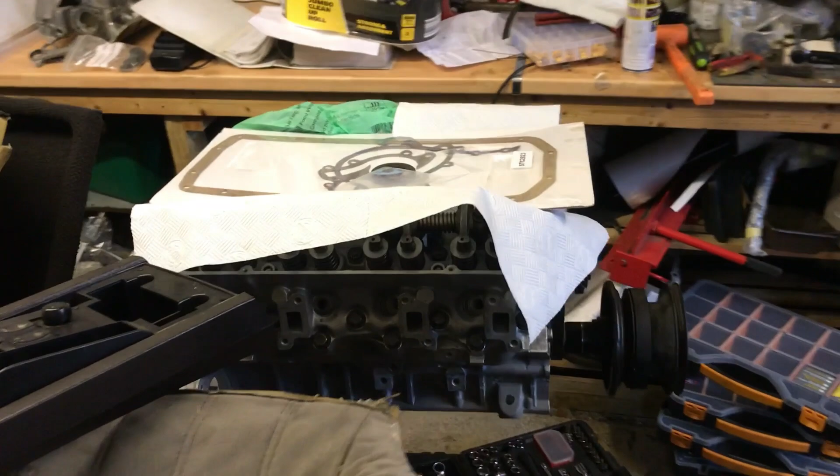After the successes of putting the engine mostly back together, my workshop became a complete mess. So I am going to do some more work on the engine, including fitting, well, I don't know what I'm going to do. I'm going to tinker with it. But I need to have a damn good tidy up first, so that's what I'm going to do.

That's better. It might not look like much of an improvement, but for me this is actually quite tidy, and I've uncovered some of the bits that I needed to start reassembling the front cover and the windage tray, or windage tray, whatever you want to call it. And I found the sump as well, which I hadn't really lost, but I'd kind of neglected that it needed cleaning.

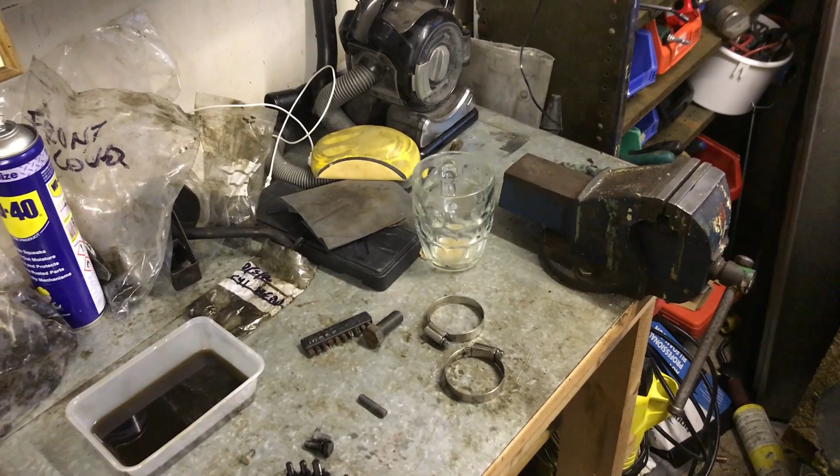One minor setback: there is a real downside to drinking tea out of a pint glass, because it's easy to knock over, and if you do knock it over, you lose a hell of a lot more volume. And I basically spilt a whole pint of tea across all of this, which then drained down, filled up my tool trays, and delayed my work, which is quite irritating. Plus I never got to drink it, which is even more annoying.

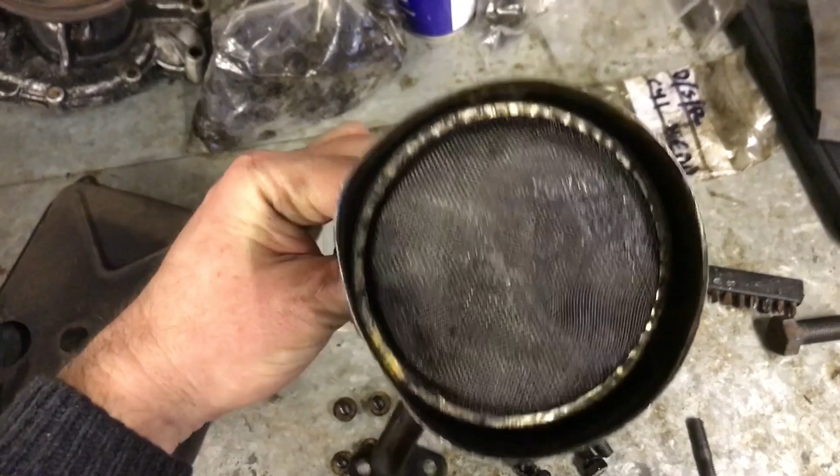I have here the windage tray, or windage tray, that needs a good scrub. I've got the bolts and the washer that hold that in, the pickup strainer and bracketry that needs to be hammered back into round, and that gauze needs a damn good clean. So that's going to go in the underside of the engine. And then front cover,

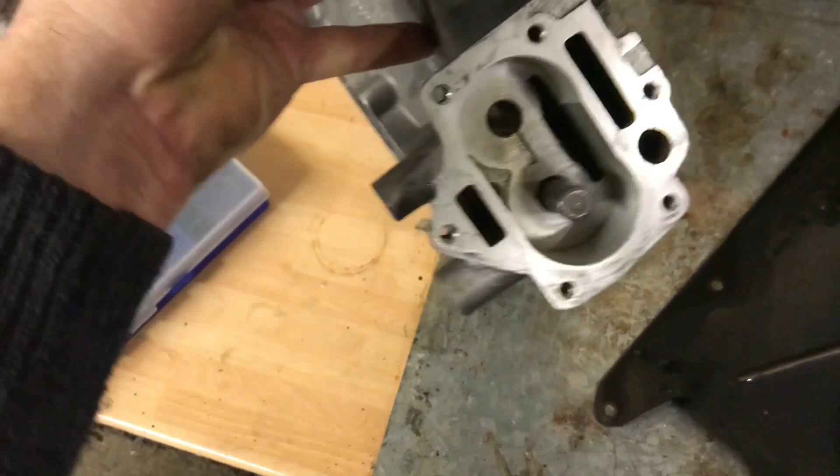I've just started cleaning up the gasket faces, doing a crude clean. It's actually a really excellent one. There are no broken studs, which is quite common. All of the threads for the water pump are perfect. The threads for the sump are perfect. And most importantly, the oil pump housing, which is integral in the front cover, is really quite good.

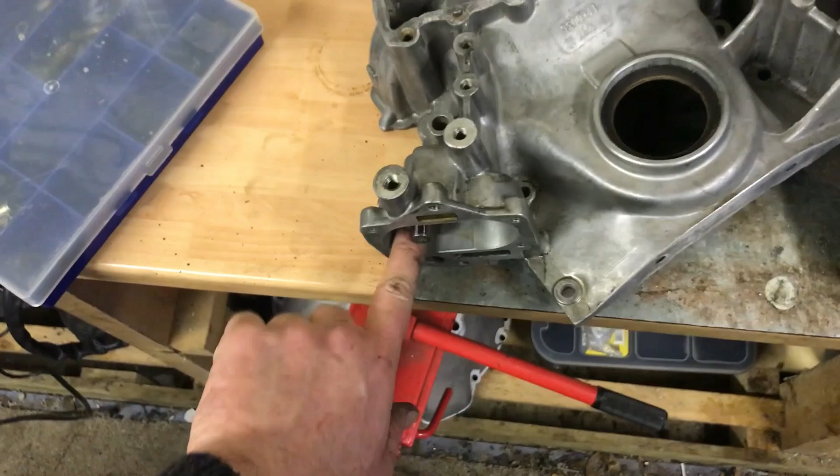There's no deep scoring. There is one slight problem with it, and it's a bit of a weird one that I've not had before, but I'm sure it's common. Obviously this is all cast alloy, or an alloy of some sort, and a piece of steel or something very hard has gone through the pump and then been smashed into the side of the pump housing there. So I can just point to it with my fingernail right there, and it's a rough spot.

So that's probably scored the gears, which I haven't found yet. They're in one of these bags or down there somewhere. But if I don't get that out, whatever pump gears I put in there will get scuffed up by that, and it'll break up more particles and generally be a big bad idea. Oh, have I just picked it off? No, I haven't. There's still a burr there, even if I've got the steel out, but yeah, that'll need some attention. Anyway, I'm wittering, and I'll clean up stuff and report back when I'm actually bolting things together.

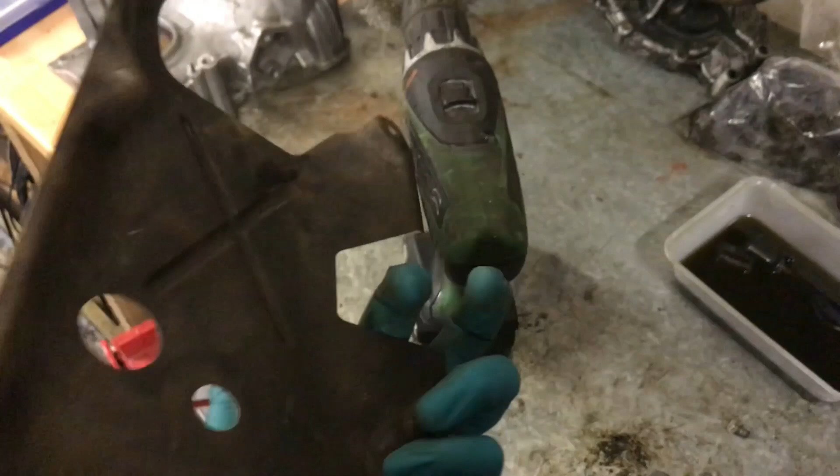This is taking forever, but I'm cleaning up the windage tray thing with a drill with a wire wheel on the end of it. But it's a pain because it's well baked on there. I probably don't need to, but I figured the whole engine is being essentially renewed, and all of the rotating components apart from conrods and pistons and the little end bearings, so it'd be silly not to get all of the crud and crap off this, because it could break off and then go through the oil ways, which might be a problem. Still having a super time cleaning stuff.

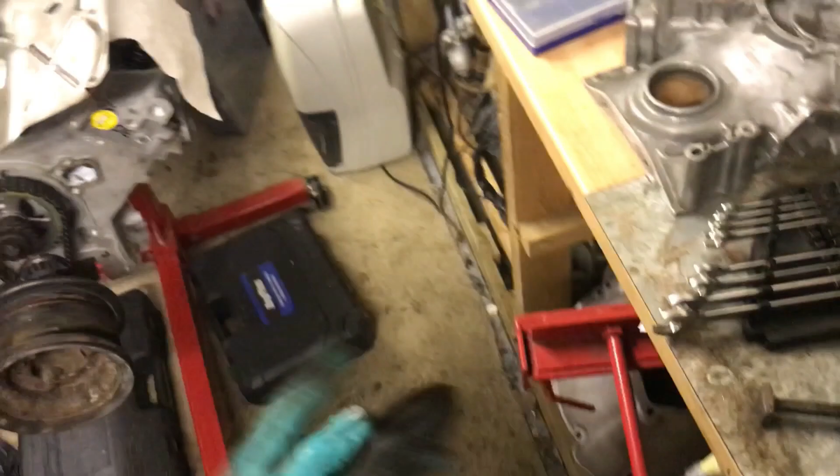Windage tray done. I'm doing the pickup strainer now. That is the crap that was inside it, so good job I took it apart, get rid of all this shite, because although the oil filter will get it, there's no point putting an engine back together again with this stuff in there already, just in case the filter does gum up or do something weird. What was I doing? Oh yeah, cleaning stuff up. That is part of the bracket for the pickup strainer. That is the rest of the pickup strainer.

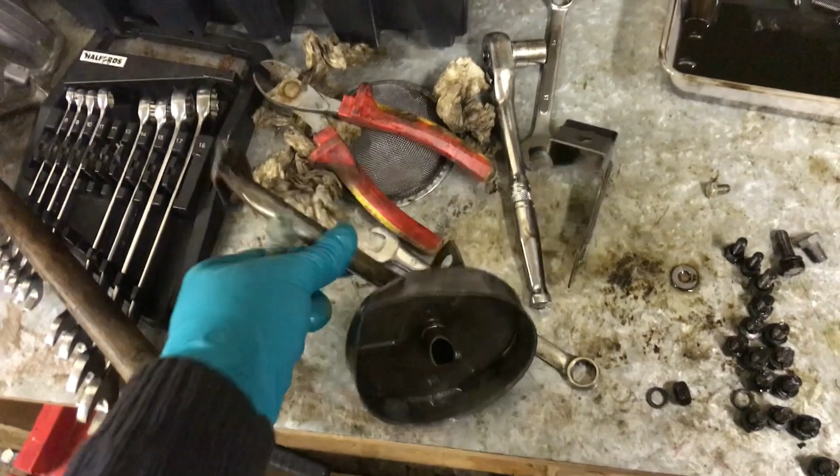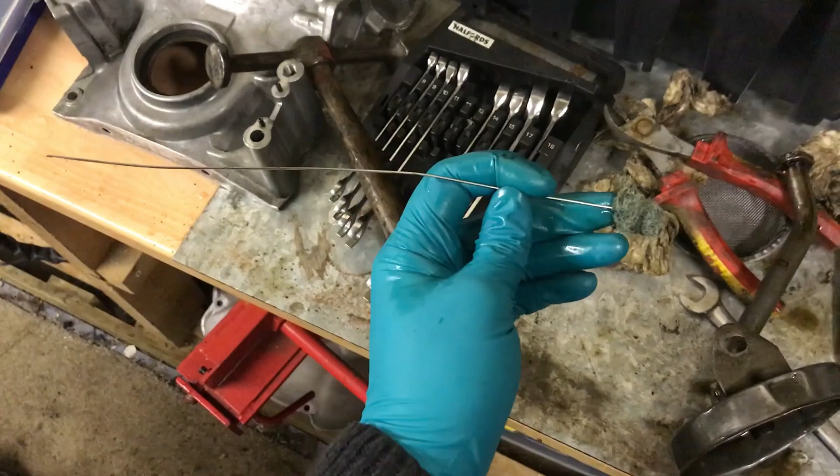The gauze is there. I'm wanting to clean the inside of the pickup tube up to the pump, and I mean, who knew windscreen wiper blades had so many uses? I don't know whether you're watching this video series or how I'm going to upload it, but basically I took one apart to use it, I think, first to help me find top dead center on the engine, then to make a feeler gauge so that I could set my hydraulic tappet follower preloads, and now I'm using it as a tool to scrape the inside of there. So I've got an old Scotch-Brite pad and then hammered the end of the wiper over, so I've got a little scrubby pokey tool. So I shall assault this now in various manner and clean it out inside.

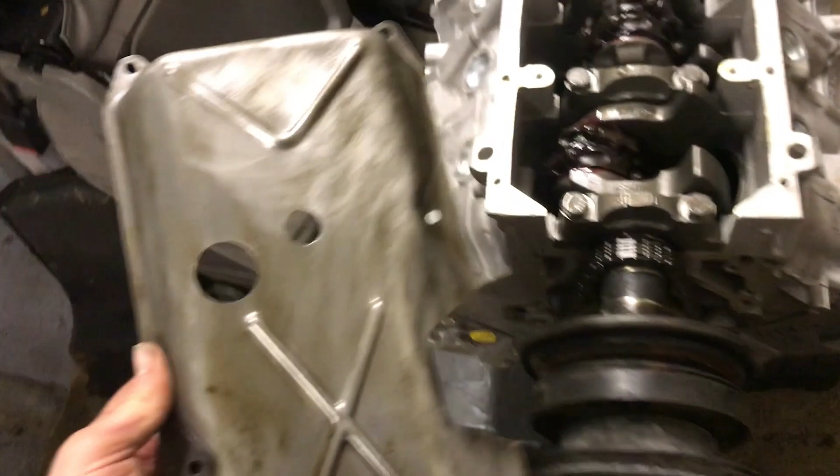After what feels like an absolute age, I finally get to bolt something back into the car or the engine. I just got to remember which way round it goes. Well, it must go that way. There are a few other bits that need to go in first. Main cap number 4 has a threaded hole in it for this, which is a stud to hold the windage tray, and then the pickup strainer. So that goes in first.

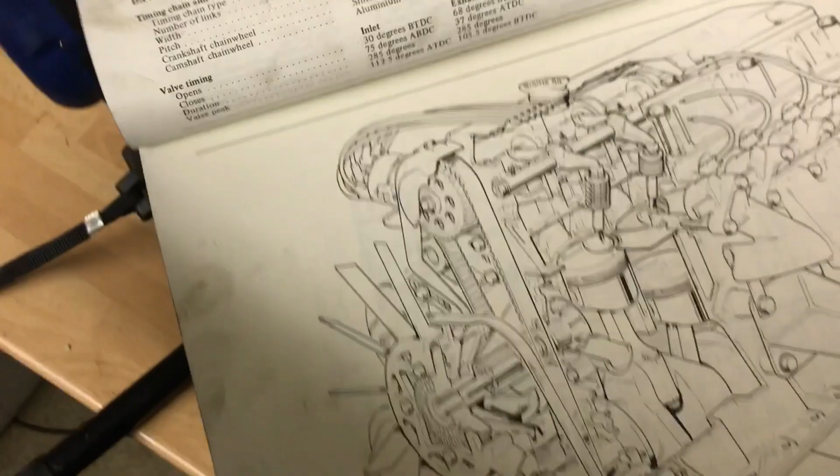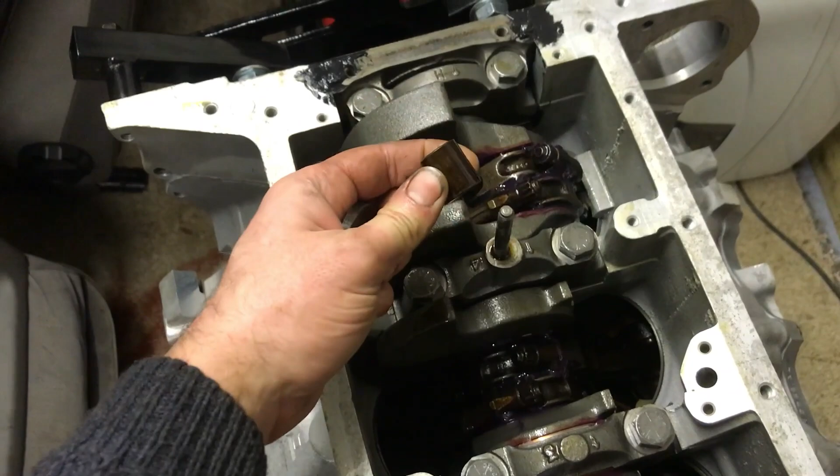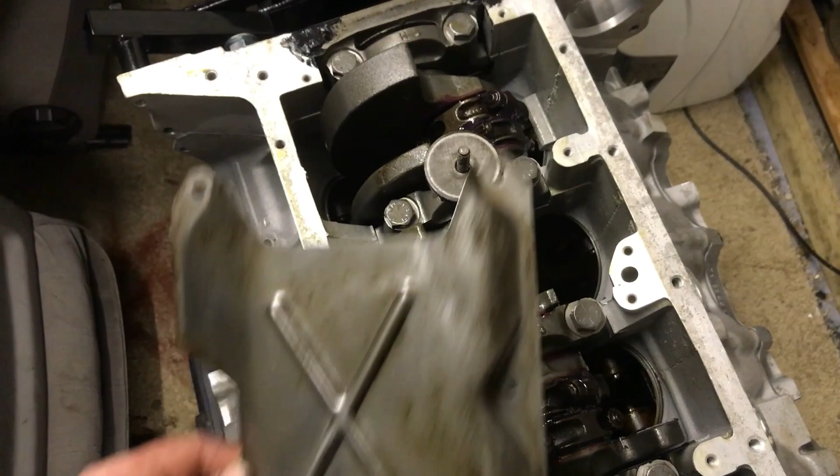I will pause here. Yeah, it was stud, big fat chubby washer, boss. And the other washer, which I have now put there, is for the underside of the pickup strainer. So that goes on. Like so. And then I've got my 6 little bolts with spring washers to go in there. Cool. Trays on.

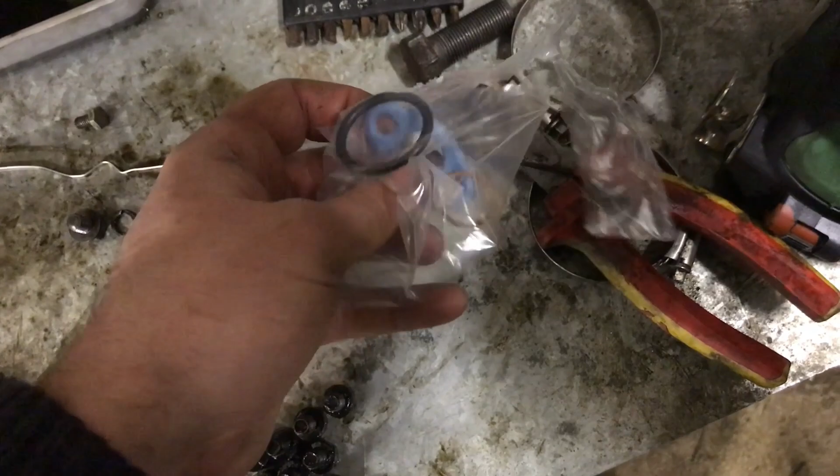Pickup strainer next. And in here we have a new paper seal gasket thing. Now if I was using the GoPro I could shove it in my mouth, whereas right now I'm using the iPhone. Jesus Christ. There we go. Right, new paper gasket. Pickup strainer. Well, it's not particularly interesting really, is it? That's cool. Something constructive and shiny fitted.

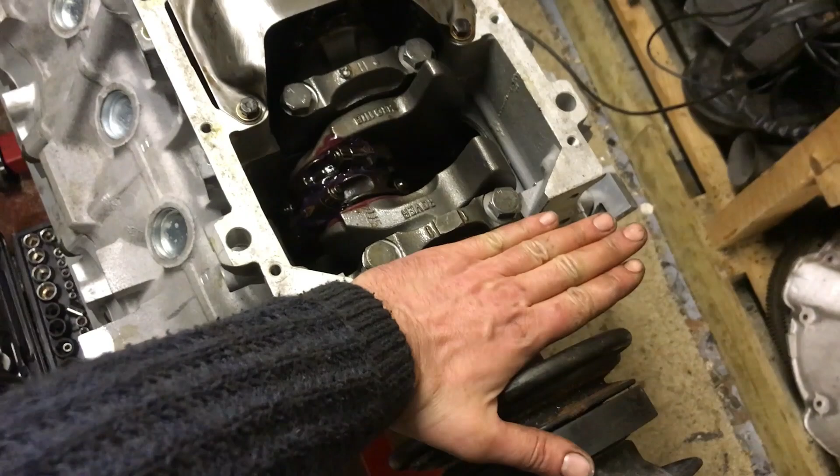So that's all nice. Logical step would now be fit the sump. But I can't, because the front cover has to really go on first. And then I put the sump on afterwards and hold it all together, because the front cover actually seals this part. So I've run out of time tonight. I've got to go and cook dinner.

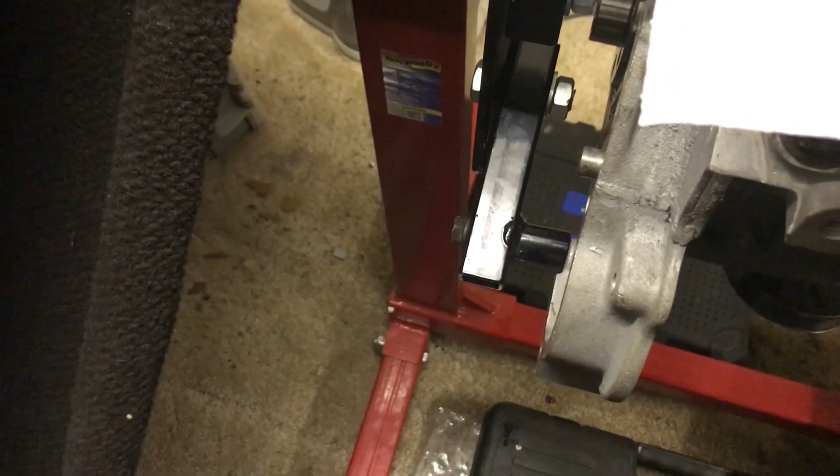So until next time. I was just about to walk out of the garage or the workshop, and I got a bit paranoid of the weight of the engine now fully assembled nearly on the engine stand, and it was really sort of cocking over, and I was worried I might be straining the lugs at the back of the block, which, although it's alloy, they probably could bend. So I've put a bottle jack under the front just to kind of support it a bit. I mean, there's an awful lot of angle of dangle, but yeah, better than nothing.

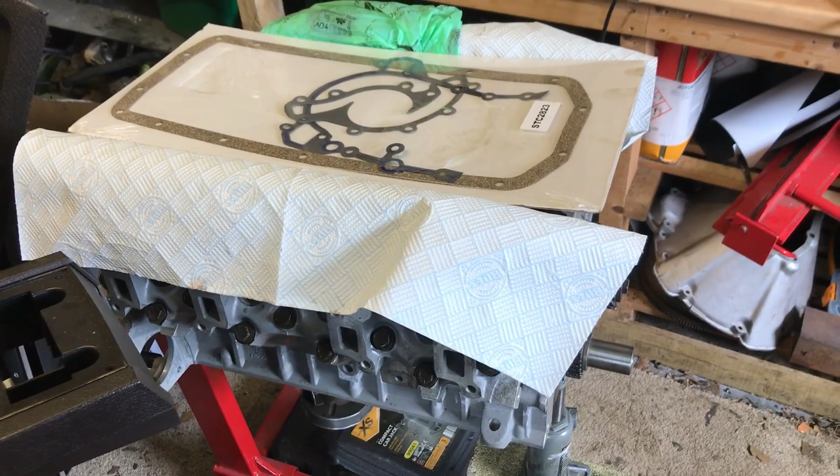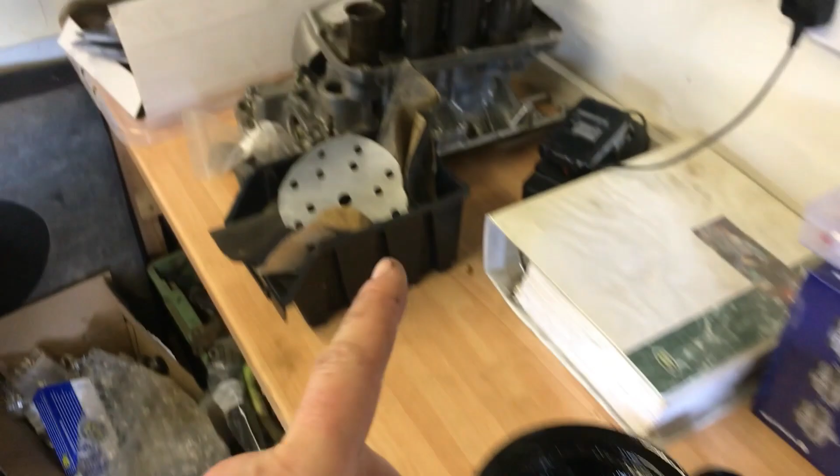It's the next morning and I'm busy cleaning and finding stuff really. I've cleaned up the crank pulley. I have also cleaned up and degreased the sump, ready for painting, and it's warming on the radiator. The can is warming over there. I got fed up of cleaning things, and while I was going through my boxes of bits that I took off the engine, I found my new drains for the block. There's one on either side.

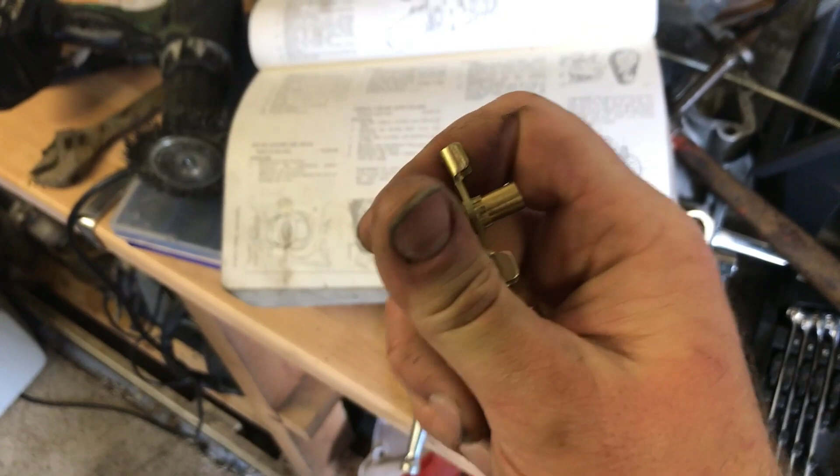That's an original one. This part here is a conventional right hand thread on a taper. This bit to actually open the bleed valve is a left hand thread, so that obviously as you're opening the valve to let water out of the block, you're not accidentally unscrewing the whole union from the block. But they seize up and they go gammy and horrible, so I'm going to put a bit of copper slip on the thread between the two pieces, sort of in there, and then this is a taper, so it should bite into the alloy and seal nicely. But I'm also going to put some Hylomar blue, if I can find some. There we go, non-setting stuff.

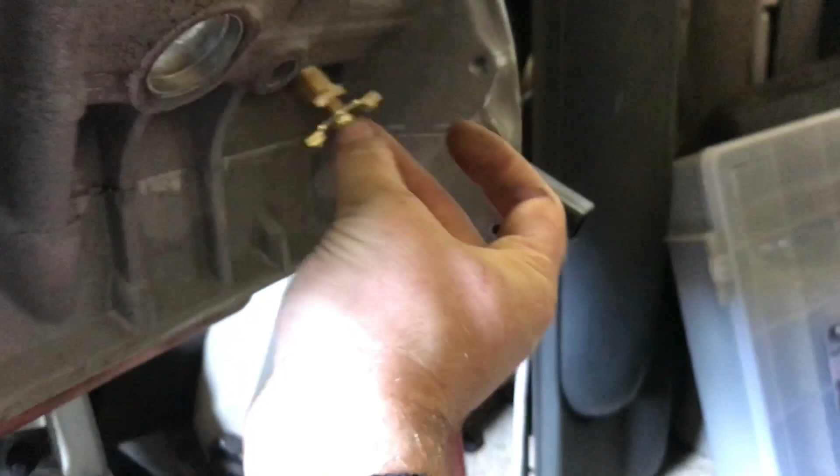So these will get screwed in one either side down here. They're a complete arse to get to, particularly on the other side where the starter goes. So I'm doing them first before I forget. You can see what I mean about access. Even with a spanner, it just clashes on everything because they have the little thumb wheel. Whoops. Where are we? I won't bother editing that because I can't be bothered.

Right, then because of the wings on there, you can't actually put a socket over the top, so they end up being very annoying. So yeah, my advice, either block them off completely or fit them and remove them when the block is stripped to basically nothing. Don't want to go mega. Oops. And then make sure that they are closed.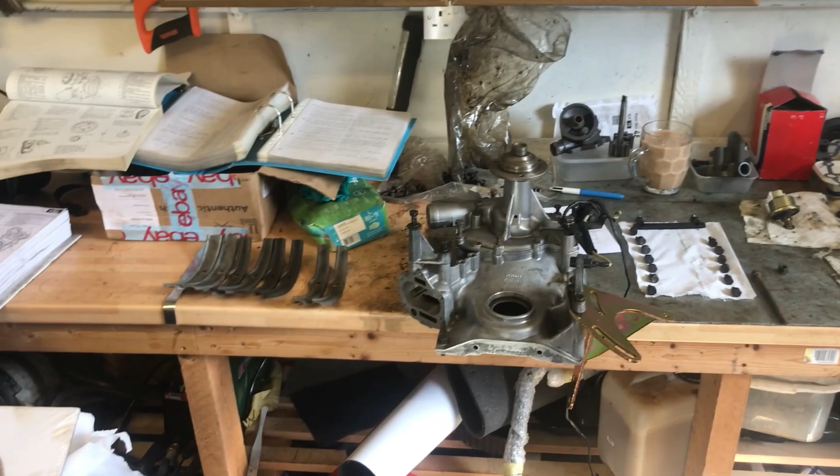Hello again. I have no idea where this video is going to sit once it's edited and uploaded, because I think it's been about 6 weeks since I did anything on this engine. That's been for a number of reasons, but mostly it's been work and Dotty. So I've had all the bits, I just haven't had any time to do it, which has been really frustrating. I had got to the stage, and you might have just watched this in a video, so I might be boring you, but anyway, I'll pretend like I haven't just uploaded that, if I have or not.

Basically, I got to the point where I was going to put the front cover on and didn't have the right gasket, because I had one for a later Land Rover with the different oil pump, which has a different front cover and different water pump, so that did cause me a slight delay. It turned out I had some anyway, but I've bought one or two new ones.

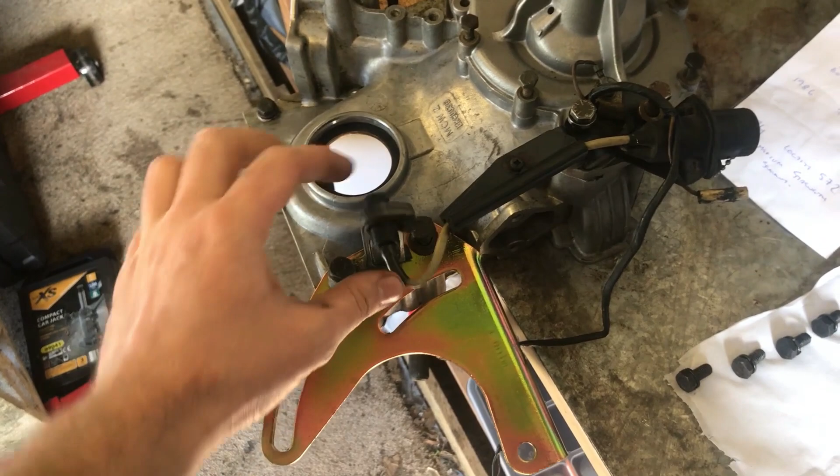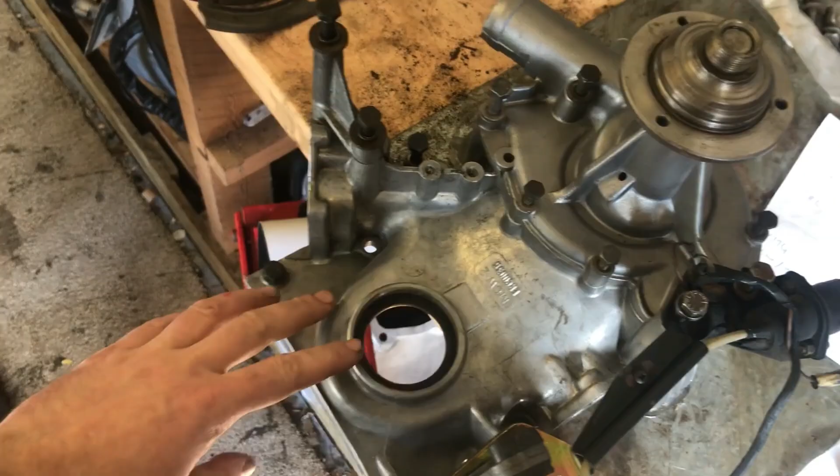I've got the front cover with the water pump and all of the brackets and things arranged. It's quite a complicated affair because you need the power steering bracket, the pickup sensor for the crank pulley, the diagnostics plug and the water pump, and all those bolts go all the way through the front cover onto the front of the engine. So it pays to be organised and find all the bolts and everything.

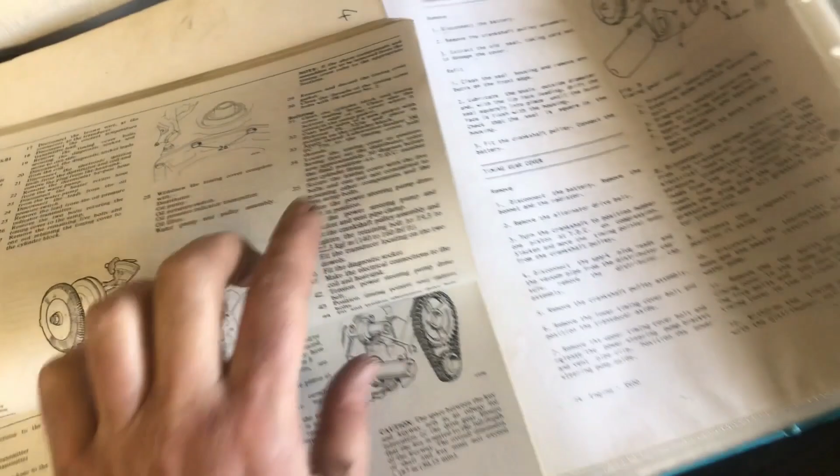Then the other interesting point: these are steel bolts and they go into the alloy block. In the various manuals you get told to put different sealers on the threads of the bolts to prevent them seizing. This is the early 1976 or 77 manual, and it says to use 3M EC776. That's the same in the 1980s SD1 book. By 1994, with the Range Rover, even though it's the same sort of arrangement of cover, they say use Loctite 572. So I've just done a bit of a Google to see what those are.

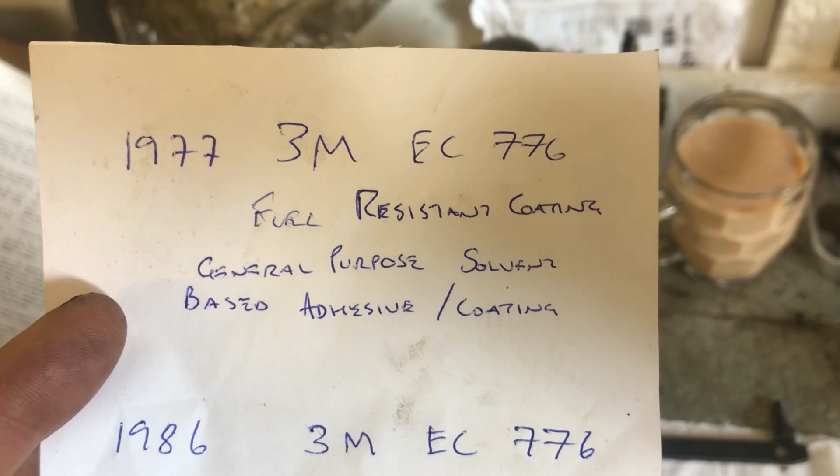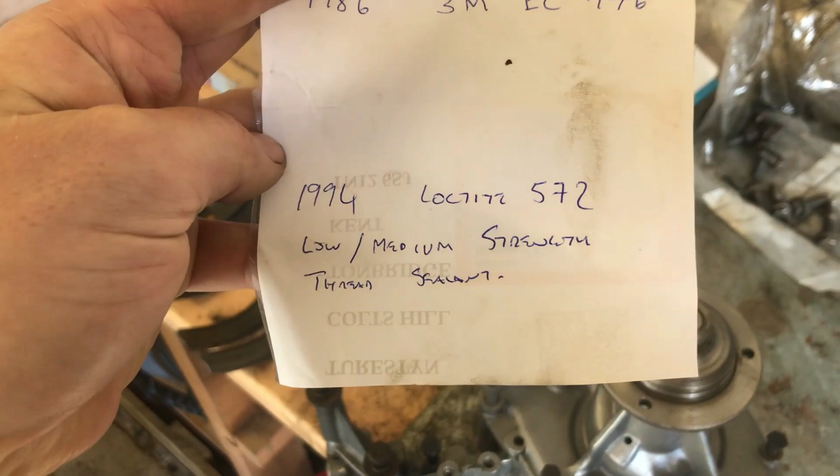EC776 is a fuel-resistant coating, general-purpose, solvent-based adhesive coating. So it's like something sticky, you just shove it on the threads, and it's, I guess, designed as some sort of anti-seize, but better than copper slip. The Loctite is a low medium strength thread sealant, so again they're telling you to put stuff on the threads to stop them seizing in the block.

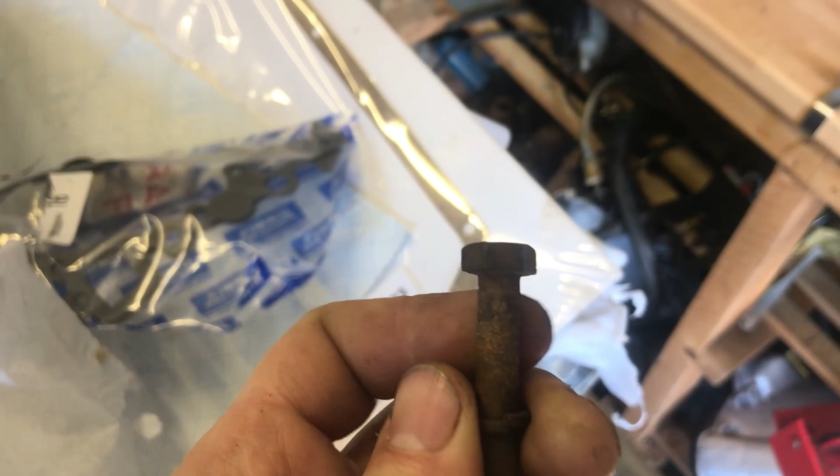This is what I've observed in the past. Not only can the threads of the bolts themselves get welded into the block and snap off, but you can actually get some, let's see if I can get this to focus, nasty corrosion. This one isn't particularly bad, but this is one of the bolts that goes right through the cover, and you get this really nasty corrosion, it eats away and you can end up with a bolt that's really thinned out, necked out, and they just snap off here rather than at the block, which is also really annoying.

So what I tend to do is I cover the whole bolt in Hylamar blue. You probably shouldn't use it in this, but I've never had a problem with the engines I've taken apart. Mind you, they've only been together for about 3 or 4 years, so people will tell me I'm wrong, and I don't really care because it's just what I'm doing. But the reason I've listed all these is so you know what you should be doing. You don't necessarily need to follow me.

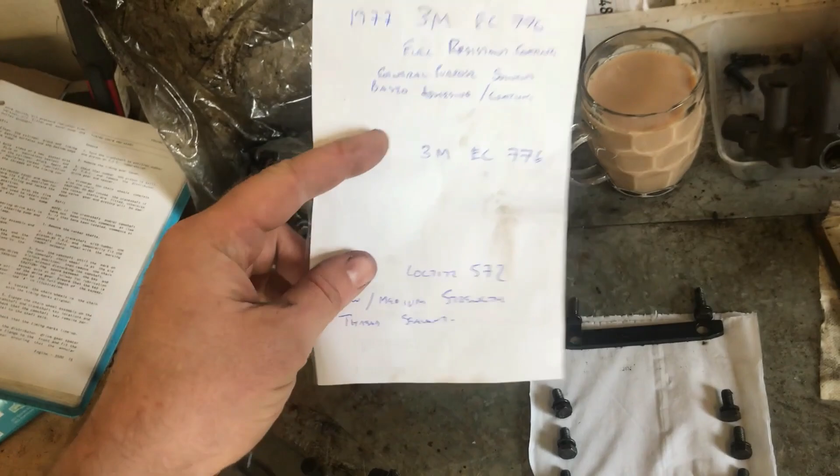But what I'll do is I'll take all of these bolts out, cover the threads in the Hylamar blue and all the way along the side of the bolt. Then I might go back and put a tiny bit of copper slip on the end as well. And then when that's in there, it shouldn't seize and it shouldn't corrode from general conditions in the engine bay. So after that rather long protracted explanation, I will now start putting things together again.

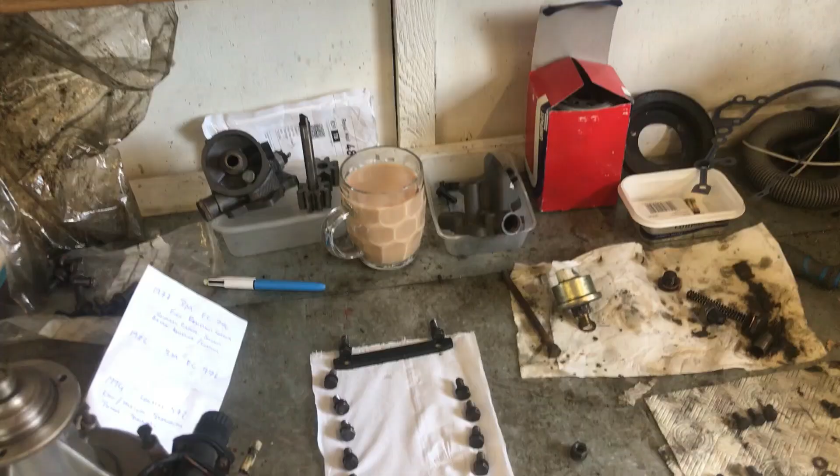And also the mug of tea, or pint glass of tea, has returned. Somebody asked why I've got a pint of tea, and it's just because I'm lazy and I can't keep bothering to go up and down the garage to make another cup of tea, so I just have a pint one. It lasts longer.

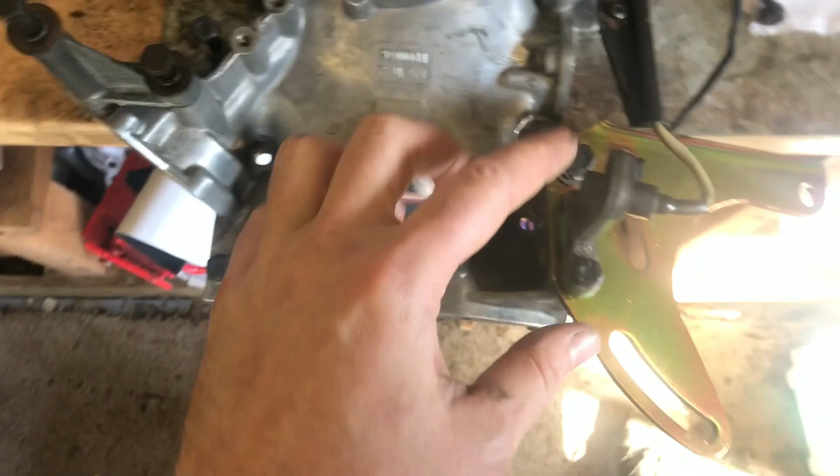There is a bit of an order to this. This can't go on until the crank pulley's on, so you have to put the cover on, then I'll put the seal in, then I can put the crankshaft pulley through, then I can put this sort of arrangement on. So it is a bit of a fiddle, and it's worth having everything set up ready. That's the Hylamar blue that I'm going to be putting on the bolt threads, and that's the Loctite black, which I'm going to use to seal between the paper gasket and the block.

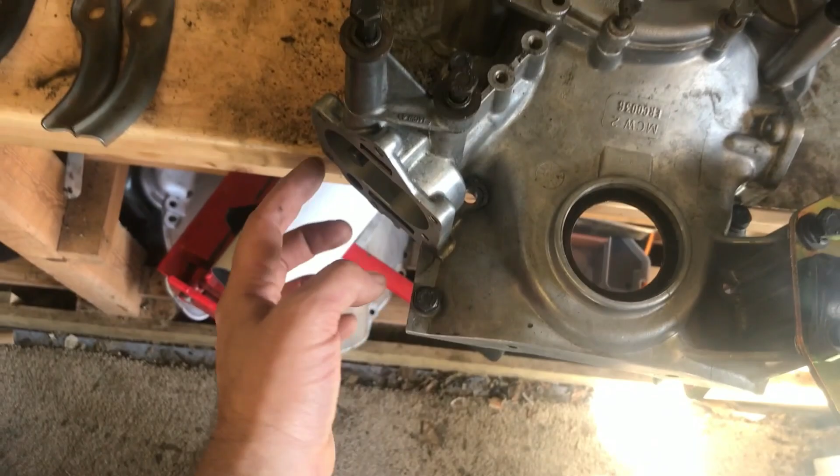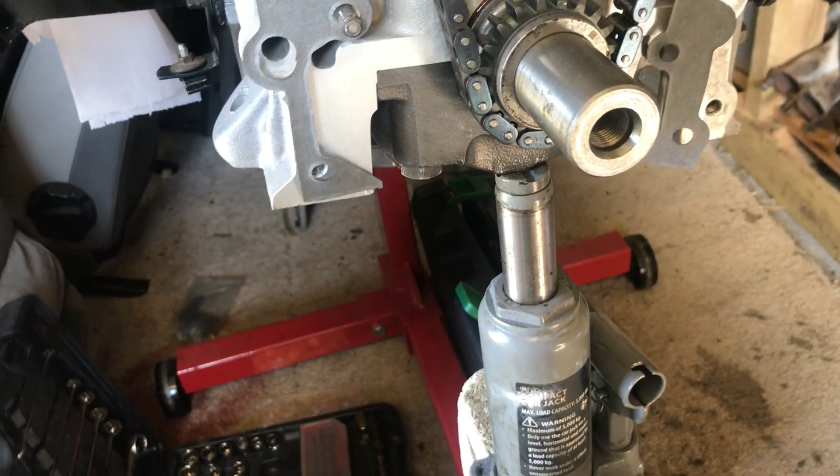One other thing to be super careful of: they made lots of different engines and lots of different timing covers over the years. Not only do you need the shape to be right, but you need all of the holes to be right. Sometimes down here where the oil pump gallery goes through, you're missing a hole and you won't get oil pressure. So if I look at this one, that goes like that. I'm pretty sure sometimes one of these is not right. So just double check you've got all of these holes where you need them before you put your cover on. I know somebody who had to take their engine apart again, it wasn't me, to get that right. So yeah, don't screw it up.

Just making an observation, one of the reasons those bolts might get corroded is they're very close to this gallery. So if you don't seal between the water gallery and that bolt thread there and there, perhaps that's why some of them I've taken apart have been really badly corroded in that area.

Timing cover balanced on. That is the wrong water pump gasket, of course. That's the one for the Range Rover. I need to go and find the correct one for my water pump, which will be somewhere around here, but where exactly? Ah, there it is. Cool. Now that was easy. Right, so yeah, that's going to go on there.

And for that, again, I could use Hylamar blue because it's fine with coolant, but I'm actually going to use a Loctite black because, I don't know, it always just seems to work brilliantly with everything.

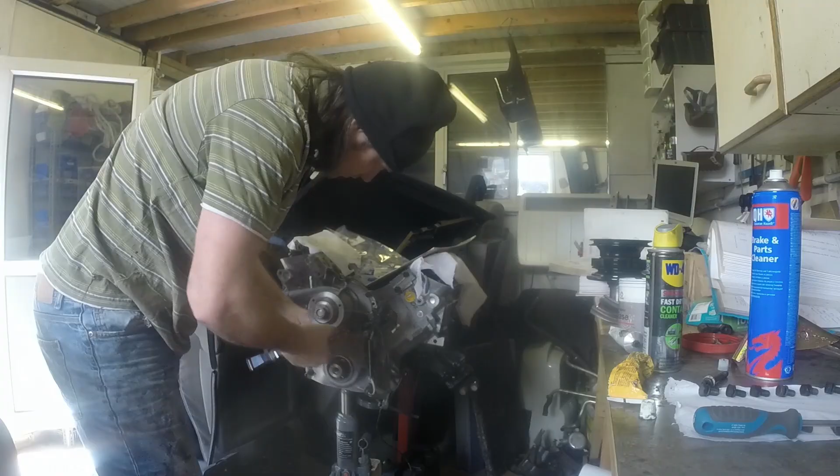That's on and nipped up. The bigger ones that go right through into the block, they're to be done to 27 Newton meters. And the water pump to the timing cover is also 27. So bish bash bosh, I'll torque all of those up. Then I'll fit the front timing cover to crank pulley seal, put the crank pulley on, and then I can put my power steering bracket and the rest of the timing thing.

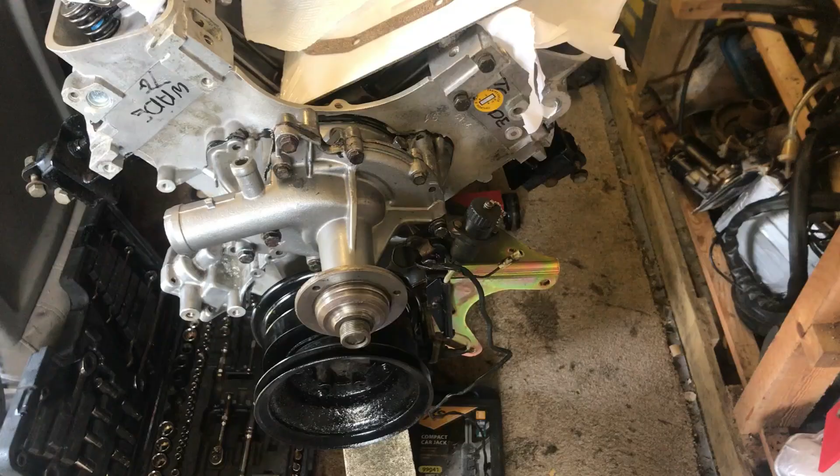So that's all on now, everything's torqued up. A minor point, these smaller ones, the book says do them up to 27 Newton meters. All they do is hold the water pump to the timing cover. It just felt horrible and I didn't want to strip a thread, so I only did them up to about 20 Newton meters. On one of them I didn't even go that far, it just felt wrong. It hasn't stripped, but yeah, I think maybe 27's optimistic, and maybe it's fine for a brand new engine, never been used before, but I didn't bother.

That's all on. My nice newly zinc passivated power steering pump bracket is on. Crank pulley is on, and I've just done that up by hand. I'll go and get my rattle gun in a minute when I can find it, and I'll buzz that up. Then I'll torque it when it's actually in the car. Next thing, go and have some lunch. After that I'll turn the engine over and fit my sump. Gasket is there, bolts laid out over there, and then really it's the inlet stuff.

Fun. Engine is now upside down. The sump gasket is a cork type one, and the pan is pressed steel. What can happen is you'll take this off and you'll find that some moron has tightened it up, and not moron, that's not fair. People err on the side of caution and really do these things up tight, and what happens is it pulls up here but gaps out here, and it basically deforms the pan. So this one's not so bad.

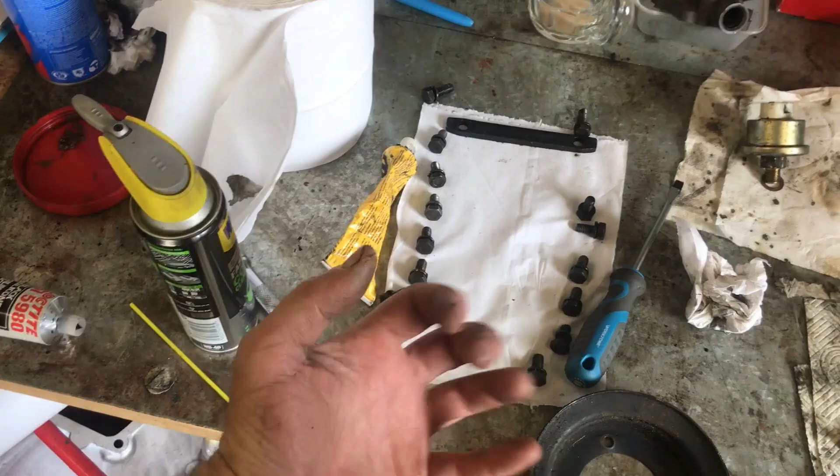I've dressed it with a hammer just to make it parallel to the block, and it's really surprising how little these bolts get torqued up. I think that's part of the problem. People look at them, think it's quite a nice meaty bolt and wang it, and actually the ones that go around, the majority are 11 Newton meters, and it's only the ones at the back which sit on top of the cruciform that are done up to about 20, I think it is.

So oil sump to cylinder block, 11 and 24. So yeah, rear of cylinder block 24 and the rest are 11. So the ones at the back are different because this steel bar, big chunky piece of metal, sits right across and crushes down onto the tips of the cruciform gaskets, which should be standing about 1.5mm proud. So that's what I'm going to do. More of that Loctite black on the block, put the gasket on, then again, then bosh it on, do it up.

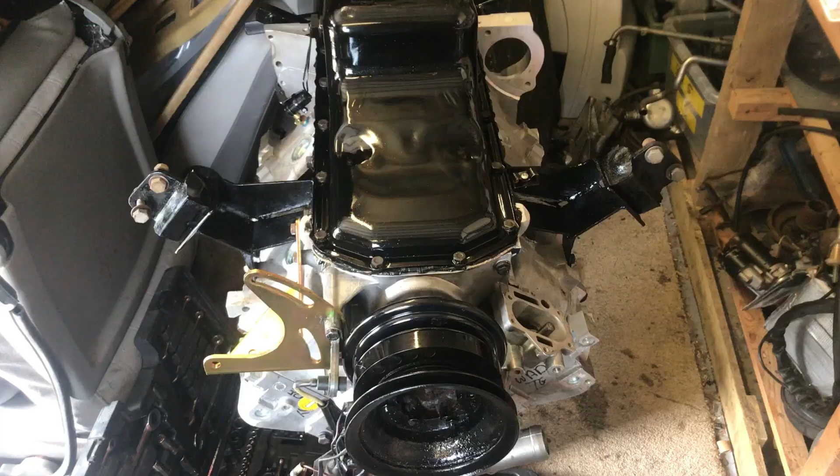Sump is now on. I probably put a bit too much sealer on, slight overkill, but it can't go anywhere because it can only go into the sump. Then it might get drawn into the pickup strainer, but I doubt it. And then if it gets through that, it'll get mashed by the gears of the pump and then filtered out in the oil filter. So even if there are a few dollops in there, it shouldn't matter.

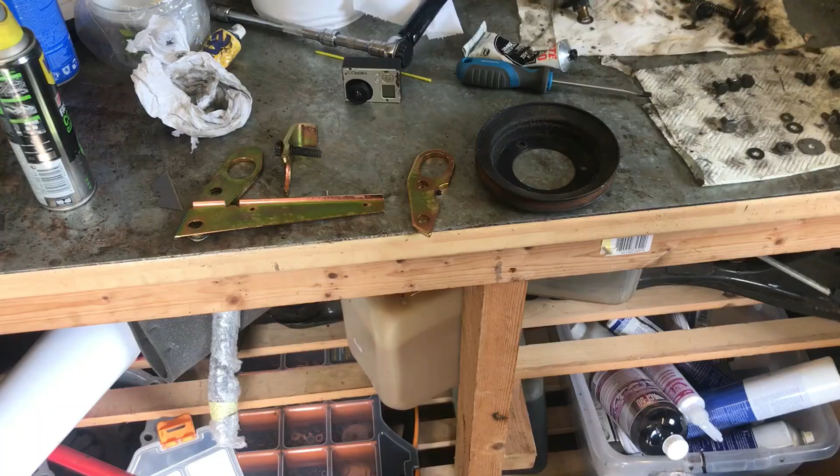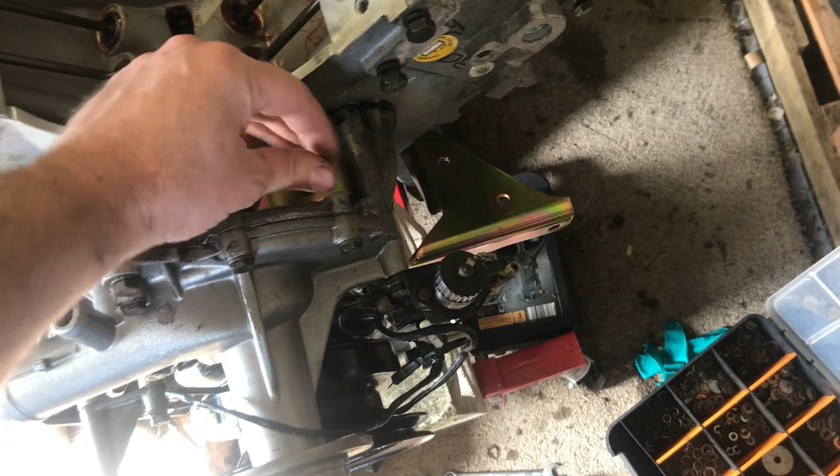Had my lunch. Now I've opened my box of more shiny things. This is random lifting brackets and engine brackets, alternator adjustment bracket, and of course that power steering bracket. I sent them all away to be zinc passivated. Originally these would have been done in a kind of silvery colour, so they do look a bit cheap and tacky in zinc passivate yellow, but I think it looks cool. I was gonna paint all this stuff black, but the paint doesn't always stay particularly well, so I just thought, well, I'll get a bundle of brackets and things done.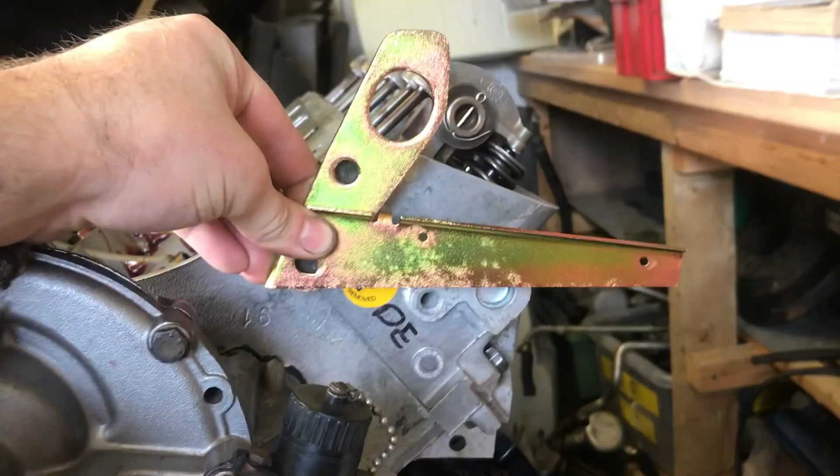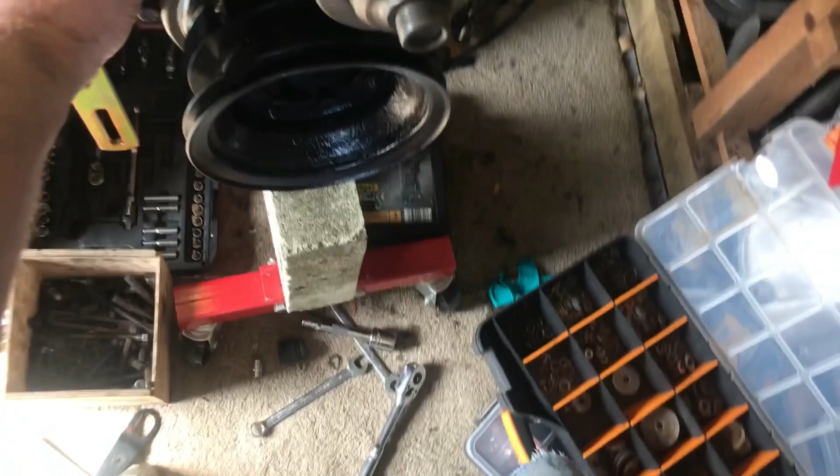That is the one for the front here, and then that is the one, I think, for over there. So I'll just fit all those up now before I get on with the inlet. Forgot I'd also had the timing pointer done, which goes on there. That can go on now because the crank pulley's on, and then that was the other lifting bracket which went over there somewhere. In fact, if I'm very clever, the good bolts are already there. Cool.

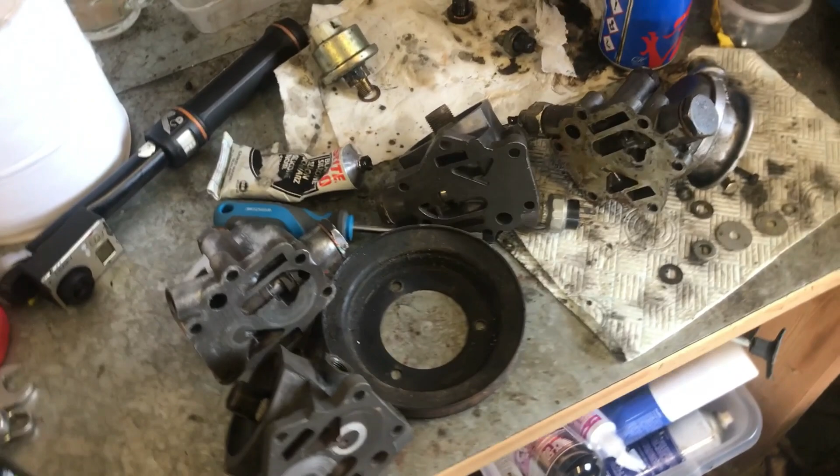Just putting the oil pump cover back together. I can't remember whether I described these in detail and what I was doing. This is the cover that came out of my car, and I'm going to be reusing it because I'm reusing the same cover and I'm reusing my same original gears. So they're all a matched set, and that means that they won't create loads of new wear particles.

That is what a brand new one looks like. Perfect. All of the anodizing is on there, no scratches whatsoever. That is what a pretty okay second-hand one looks like. There's a couple of deep scores, but nothing major. This is what a really crap second-hand one looks like, where somebody's actually linished it and got rid of all of the aluminium anodizing, and then it's just going to wear out really quickly.

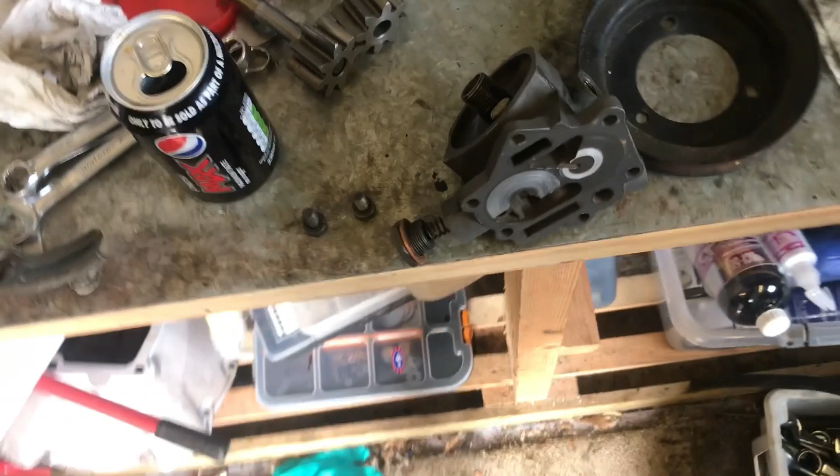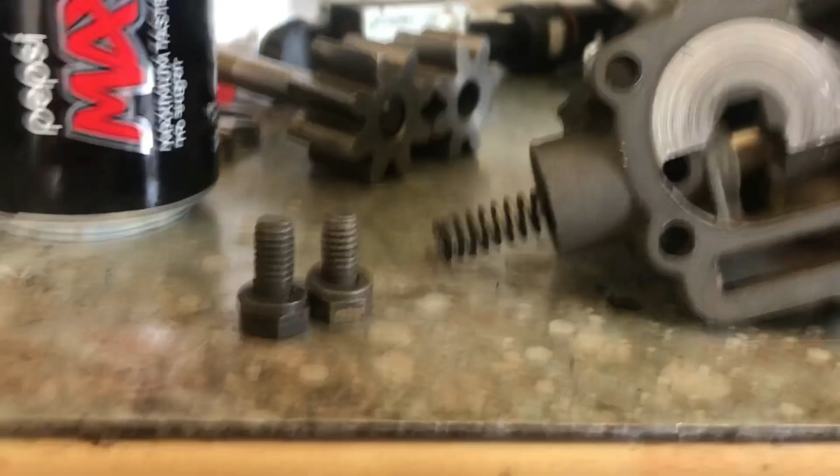Oh, that wasn't very clever. Yeah, I was reinstalling the pressure relief valve. The barrel is in there. That's the spring. And I was just checking that it was all in and moving as it should do, and it does. There's a bit of scoring on it, but it doesn't seize or stick or anything, so that's all moving nice and free. So I can put the cap and the copper washer back in, and then my two sensors, and then we're good to go. Or two sensors and a plug.

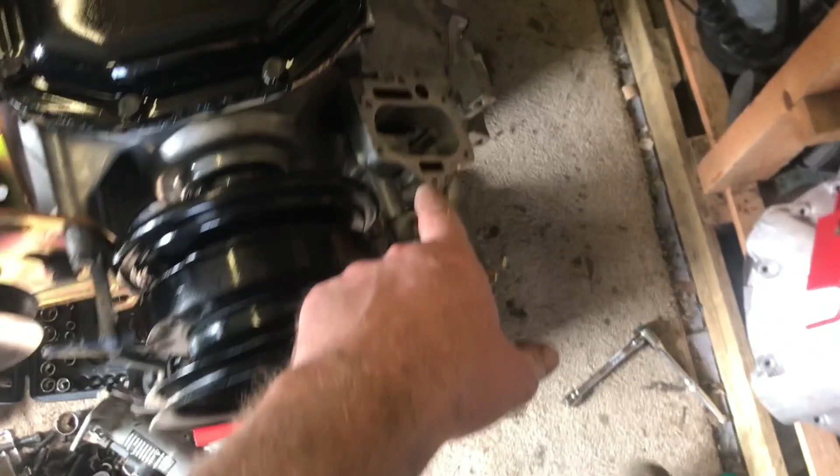I do have brand new gears, but I just don't want to fit them. I think it's nicer to reuse these ones because they have already worn together. If I put a brand new cover on with brand new gears, it all has to wear back together again, so not a lot of point really. So I'm going to fit this all back together, fit the gears, pack it full of Vaseline, new gasket, and then put it all back together again.

Now I've satisfied myself which way around all the gears go, I am going to stuff it all full of petroleum jelly, which will enable me to prime it. So that's a cute little bunny on there. Just going to stuff it all in, push the gears in, then clean the top surface off, ready for the gasket and the cover.

So all the cavities and everything were pre-stuffed with grease or Vaseline. Then I crammed the gears in, and now I'm just forcing more Vaseline in to make sure that all of the interfaces between all of the gears is absolutely whacked in there, same as packing a wheel bearing or something. All of this will have to be cleaned off the top surface. Don't worry if it keeps disappearing down that bit, because that's actually disappearing up into the engine. And I don't mean that hole, I mean the gear there, that's the one that drives it up.

So yeah, just really stuffing it in. It is a bit weird when you go to the supermarket and buy a massive vat of petroleum jelly. Never mind.

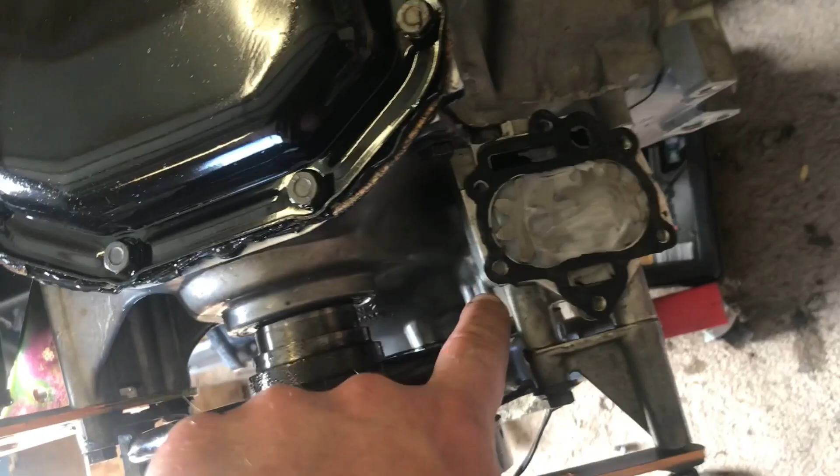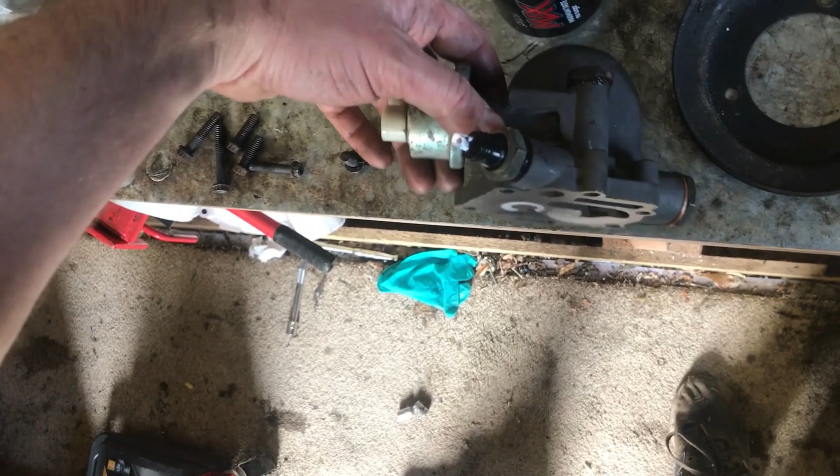Right, gasket is on, and again I've used the Loctite black. It's a paper gasket. I made the mistake once in the past of putting an oil cover on without any sealer, thinking that the paper gasket would be enough, and it wasn't. It leaked, and I had to take it all apart again in the car, which was a pain. So this time I have just used the Hylomar black, and hopefully it'll be alright. And those are the bolts, and they get torqued to 11 Newton meters because they're the UNF equivalent of about M5, M6. So into alloy, it's never going to be a lot.

So that is on, all done up. I couldn't get a torque wrench onto some of them, so I just did it with a spanner. That is a genuine new old stock part filter just to keep the dust out.

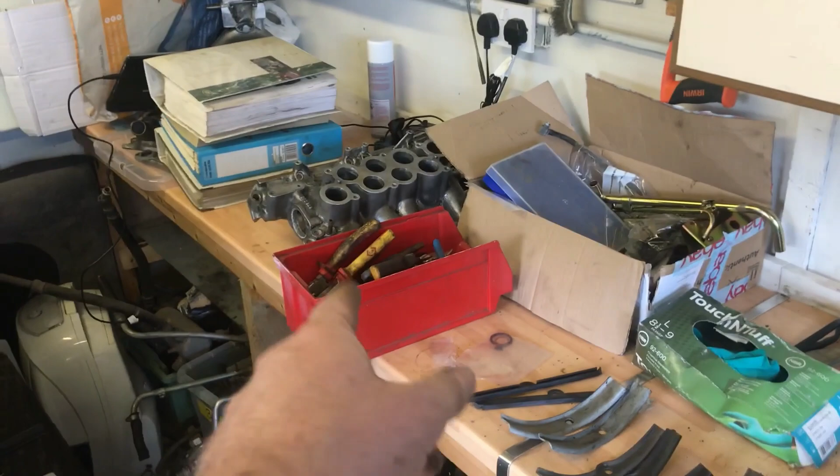I was going to move on to the valley gasket and the inlet, but I won't do that because I've got all my bits back from, not powder coating, zinc passivate to build up all the throttle linkage and stuff. The plenum top is over there, but although I've cleaned this up, it still looks a bit grubby, so I might see if I can get it vapor blasted or something, make it look shiny. I did even think about getting it blasted and powder coated, but I haven't reached a decision yet.